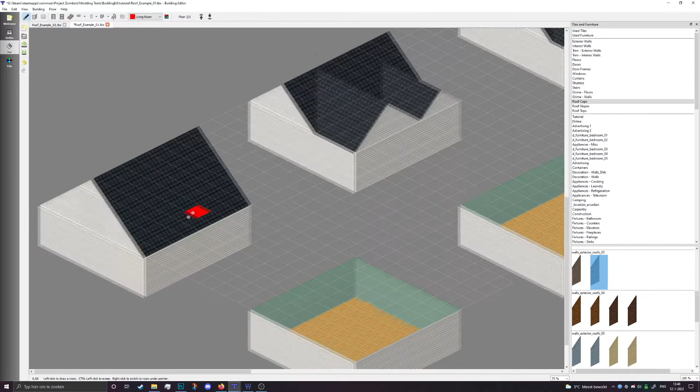Right, so first off, we'll cover how to make this one. You probably watched my previous video, so that shouldn't be too hard. Then we'll move up the line of buildings as we go on. This one is literally just a peak. I always forget if it's vertical or horizontal. There we go, a peak. And then add another layer, just add a tiny peak on top.

Now, depending on the roof cap you have selected, there may be a hole inside of the peak. You want to click on roof caps, or double click it, and you get this overview. As you can see, there is an entry that is red, meaning there's nothing there, or more pinkish, but you get my point. You want to add the tall wall version like this, or the white version here like that, and then the roof peak will know what to do with it.

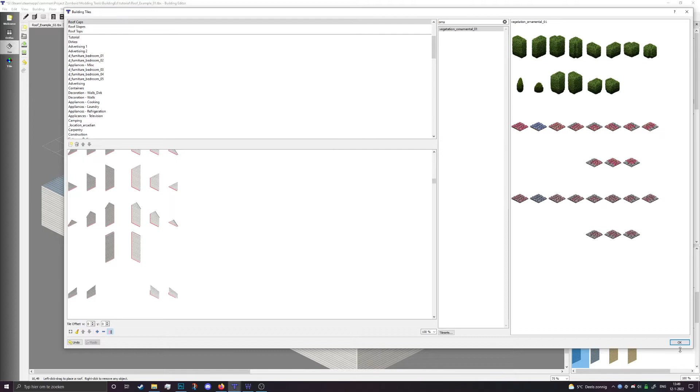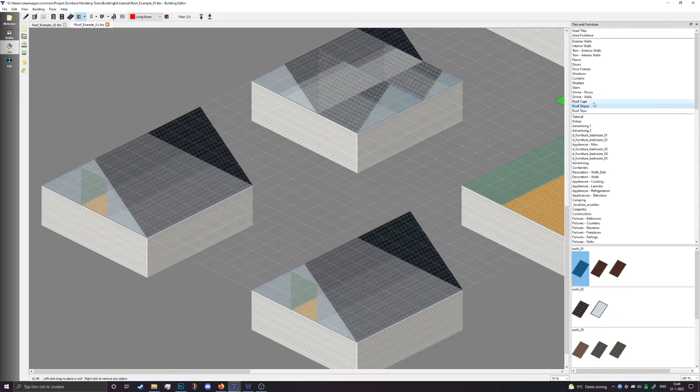Plan B is to actually go into exterior walls and just draw in the wall that is missing, like that. But if you set it up once, it'll help you out forever, and it saves you time in the long run. In this case, I'm just going to change it back to the white one I had, where there's no issues.

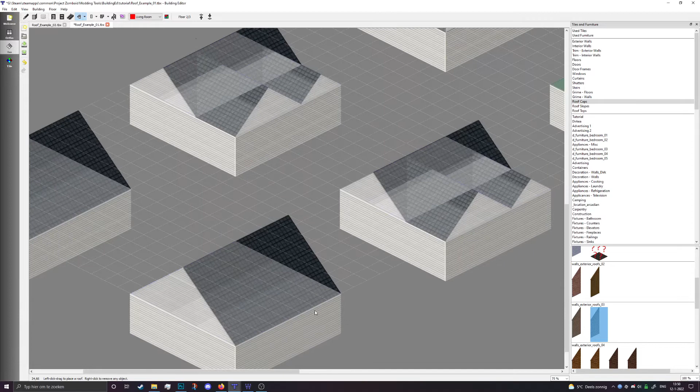Now for the second roof, which is basically just a peak with two dormers, but that already sells the building a lot more. It's not that much more work than this—I could debate it's even the same amount of work—but it adds a way nicer feeling than just having this ginormous tower of a roof on your building. It's about the same amount of clicks to set it up.

This one is one of my personal favorites, I use it a lot in my builds. I love the shallow slopes, but you need to cover up the holes with something else. I love to have a wavy effect between the shallow slope and the regular slope, and with these tiles, they line up nicely so it doesn't look odd.

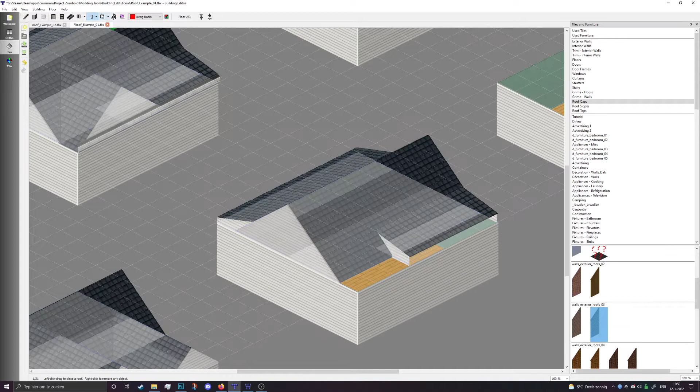Add the east one on the other side, like that, and then to finish that off, I'm going to add a little bit of a dormer to make it more interesting. Now you could set it up like this, not overlapping, but that looks a little weird. I'm going to have it overlap the other piece and make it feel like a wholesome roof that's actually working.

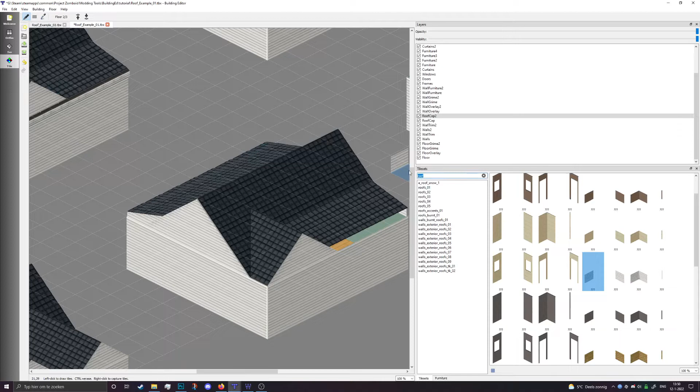Of course, you need to go to roof accents to cover up this side with the roof caps. Better extend it to have it fit the entire roof. Very easy, very straightforward—it's a nice and quick build.

Now this one is a little trickier because it doesn't look that interesting, but there is a little bit of magic behind it. First, you want to take your slopes and keep the same amount open in the corners as you go deep. So I'm going to go one deep, keeping one square open in the corners, and I'm going to do this for all four sides.

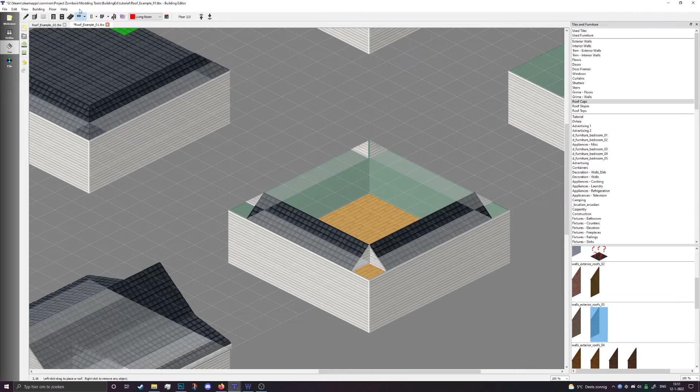Now, in addition to that, you want to get your second tab, third tab. Take the outer sides and go like that, and fill in the corners. These pieces fill in the corners very nicely.

Here you can hear the kid screaming outside. I guess he's not doing too well.

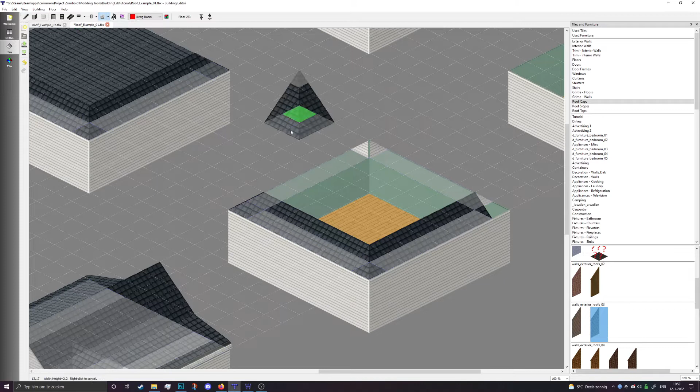Now that looks pretty good. And then you could do just a flat top with the same roof type in there. I guess that is this one.

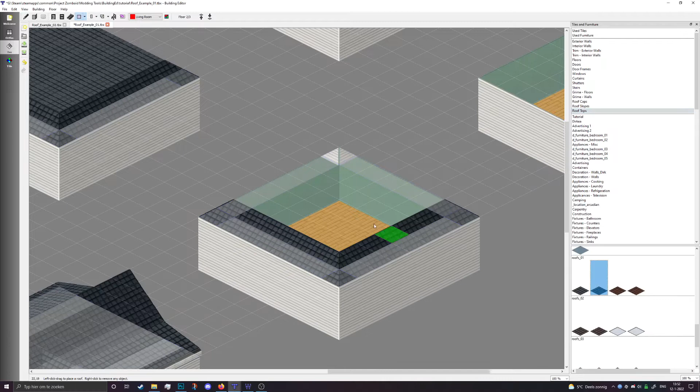Yep, drag that out. But then you can see that there is an issue, and we could turn off the roof caps there, but that's not the cleanest way to fix this. The best way to fix this is go into tile mode, search for the roof that you're working with.

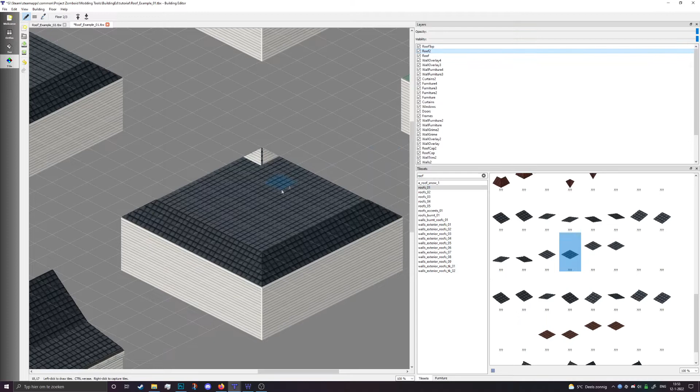Now I'm using this black tile roof. Scroll down a bit, and there's more tiles to it. And then you have these tiles which are a little bit raised. I'm going to use the roof 2 layer and just draw these out on top of it, and that fixes the roof for you.

Now this should look good in game and looks very nice. The last roof for this tile set is this one, which is quite intricate and uses quite a bit of magic. I actually did some stuff that's not really necessary, but you could add it in.

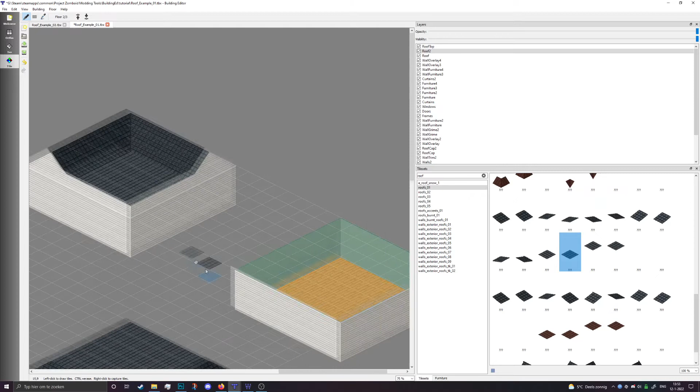Go back to isometric mode, and we're gonna do 2 peaks first. So vertical, it's 3. Did I do 3? 4. Try to make it the exact same. Go somewhere there.

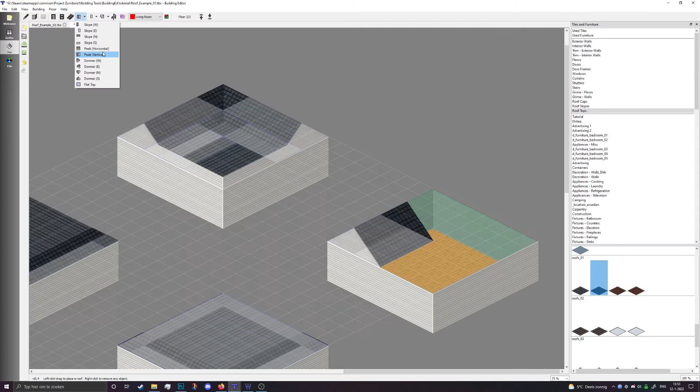Then horizontal, we do the same thing. Now we have a gap there. We're gonna go to, I think it is southeast. No, it's the other way. I always forget which one is which.

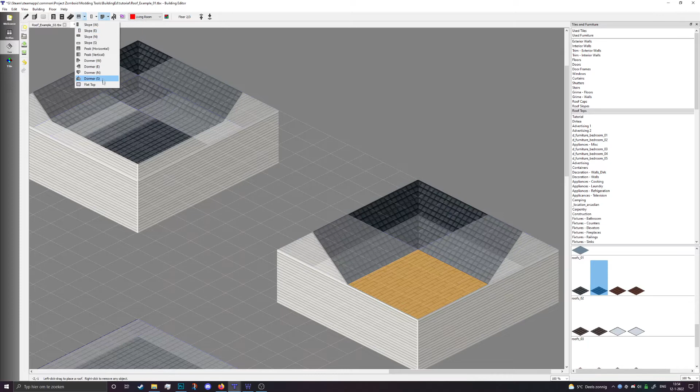Cover that up. Now there's no piece to the other side, and it's hard to cover up, so to kind of cheat, I am just gonna lay down a flat top over the entire thing, which is a nice cheat you can do in general, just to have a flat roof underneath your decorative roof. That just makes sure there's no gaps and it's not gonna cause any issues in game.

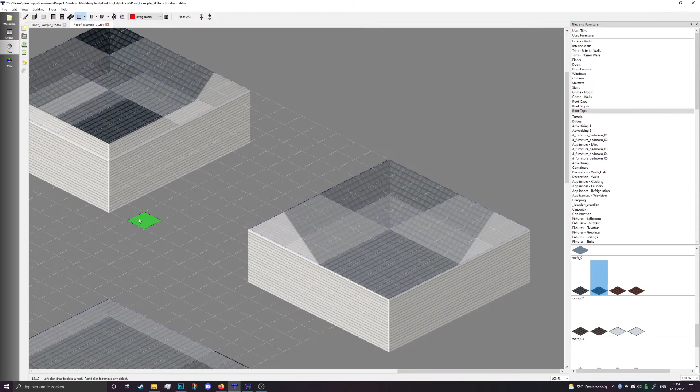But as you can see, I have a little bit of a raised wall area here, in contrast to it being on the same level. There's a limited amount of walls that you can do this with, because it's a nice little trick, but I'm using a half wall to kind of create the illusion that the roof's a little bit higher. Of course, in game you're never going to notice, because you're not going to be on the roof in most cases, but for now, I think it is a nice little trick.

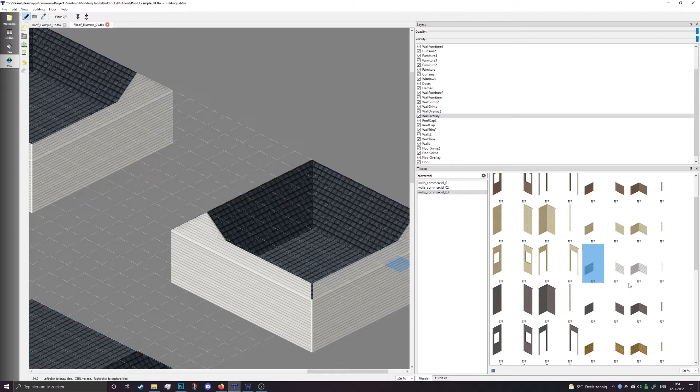I'm going to put this in wall overlay, and just draw this out here, and then take the little corner piece. And like we did with the last roof, I can actually select that color, draw that out on the roof too, and then put that up there, and that fixes that issue.

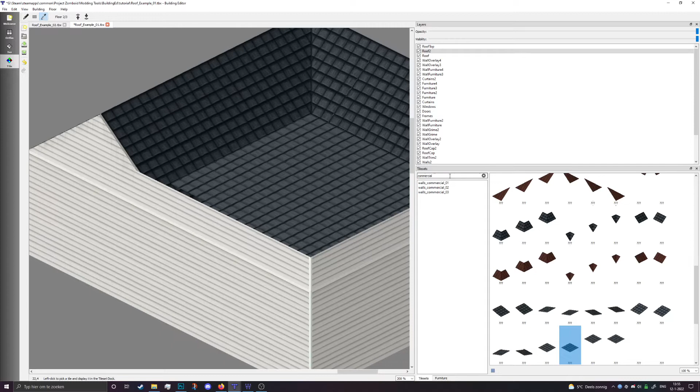Now this does create a little bit of a gap, as you can see right here, but that's not really an issue that you're gonna notice in game, so I wouldn't worry about it. But if you really want to cover it up, you can use like a trailer piece, this one, floor overlay and draw mode. And you can draw it over that, and it kind of covers up the gap there. But I really wouldn't worry too much about it.

So these are a couple simple roof styles. We'll do a couple more.

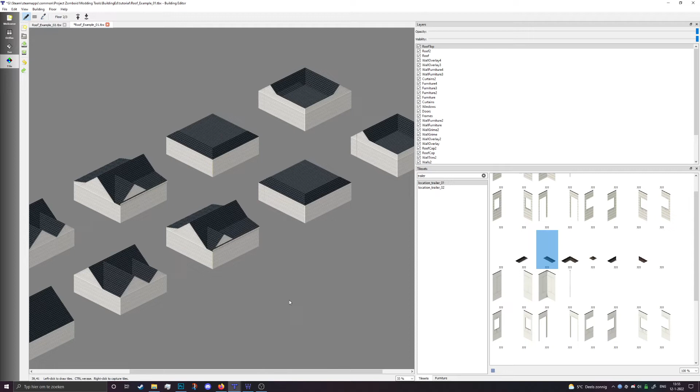Now for the other roof examples, we have some flat roofs. We have drawn out a simple flat roof before. That's not the most interesting one. The second option, of course, is to add some grime.

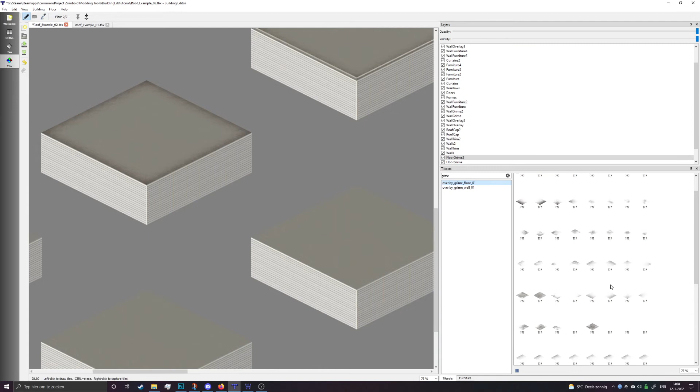Already helps it a lot. There is a cat on my lap, which is, you know, great if you are trying to do a YouTube video. But oh well, if you hear her, don't mind it. Hope it doesn't bother you too much.

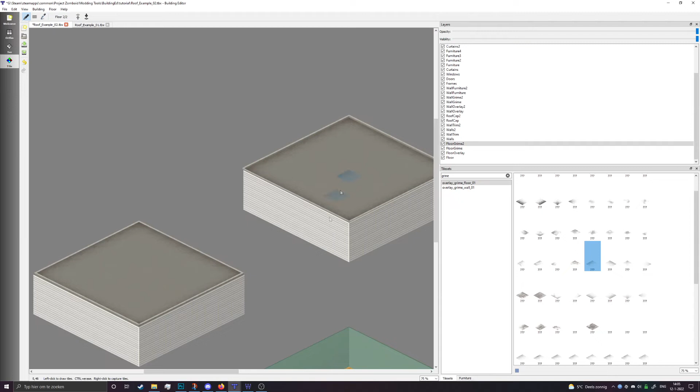So grime on the roof helps a lot, but you can do a lot more cool stuff. The first one is add some curbs, like street curbs. There are two options: you can do it on the outside, or on the inside. I'm quickly gonna draw out both for you, and since I don't want to do this ten times, I'll do it real quick.

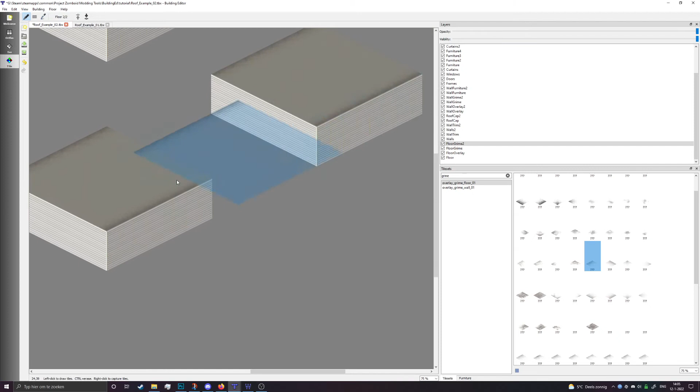So for the floor grime, I'm just gonna copy the previous one over a couple times so we can skip that part. For the curbs, I'll go to street curbs, and I have a bunch more for the blended stuff, but we're just gonna use the basic stuff. Let me deselect that real quick because it bothers me.

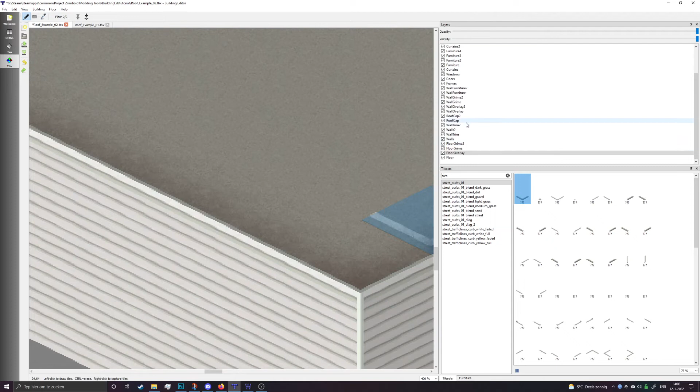Now you could put this on the floor overlay layer, but then the grime is gonna affect the curb as well, and it doesn't look as nice. I suggest putting it on any other layer above the grime - roof caps, walls, furniture, it really doesn't matter that much. Let's go for roof cap real quick.

And we're just gonna draw out a basic rectangle or square - I think it's a square building. And that really is it. It's very simple, and it makes it look a lot better.

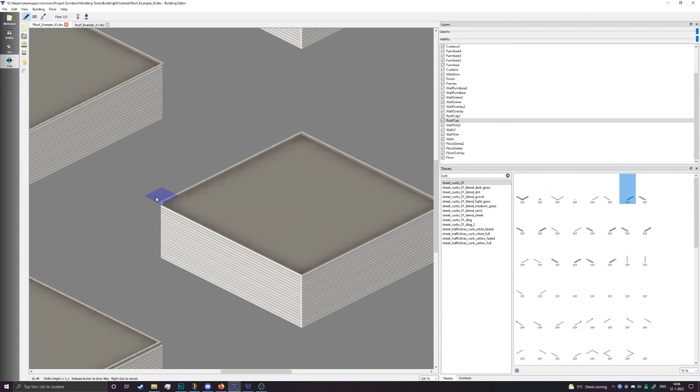Now we can do the same thing the other way around, so then we have the higher edges on the outside. And it is also a very quick build. So there is really no excuse not to do this, because it doesn't cost that much time. It takes a minute on a square building, and it really helps bring it to life a lot better.

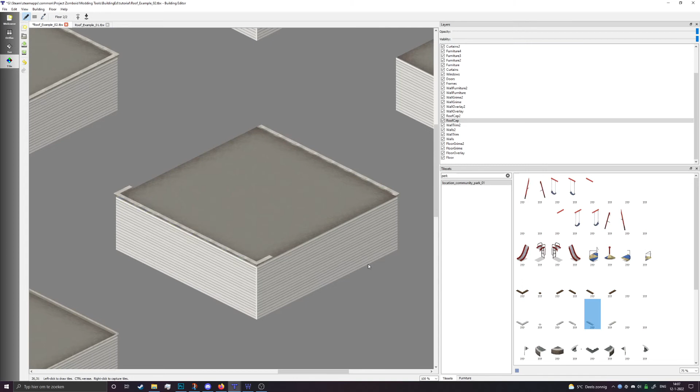You can do the same thing with the park stuff. So in parks, or in the community park sheet, there is a tile for the edge of a playground, and you can use that one and do the same thing. That also makes it look really cool.

I've never used the wooden one on a roof, but I think it will look just fine if you want to make like a shed type thing or something. Let's try it out real quick - I think that works great as well.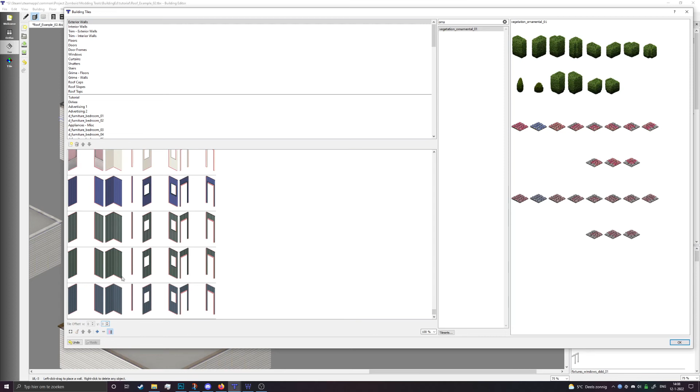Hit plus, gives me new options, and if I look for - I think it's in railings - I can just drag these in here. Save that out. In this case, I'm going to delete it because I already have it. Then it should be here, and you can drag that out, and you have a nice railing which you can easily place down. Now on the front side, in this case, I added a trim for the commercial option. Again, if this is not here, you can double click it and add it on the side. And that makes the wall for the outside look a little bit taller and nicer.

Now, there's no excuse to make shitty roofs in this game, because it's not that hard. It's just kind of knowing what you're doing. So I suggest really playing around with it a little bit, and then you can make way cooler stuff.